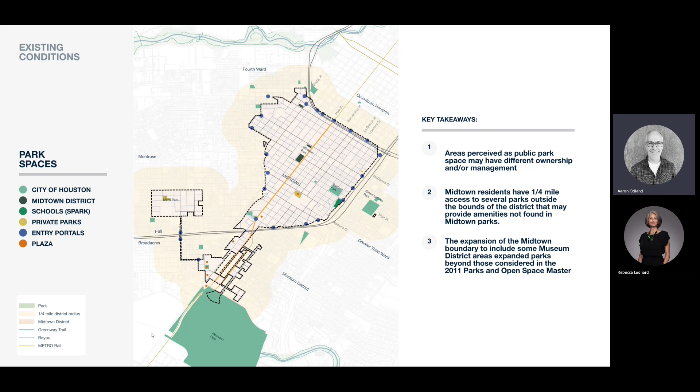This slide shows on the left a numbered key with the names of all the park spaces we saw before. The darker green ones are those that fall officially within the boundary. The lighter green ones are outside the boundary, but within that 1/4 mile offset from the district, which still makes them an easy walk in many cases for residents.

Out of the ones shown here, 11 are within Midtown, and the rest are within about that 1/4 mile walk.

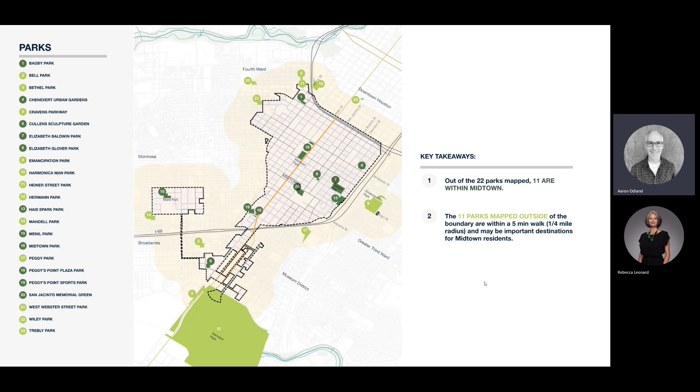Rebecca mentioned that equitable access to parks has been an important component of what we've been tracking through time, so this is the most recent example of that mapping. On the key on the left, the lighter orange colors are the 1/4 mile park buffer, meaning from a park like Midtown, you can go out a 1/4 mile radius, about a 5-minute walk. The darker orange color shows areas we're calling underserved, where you don't have access to one of those parks.

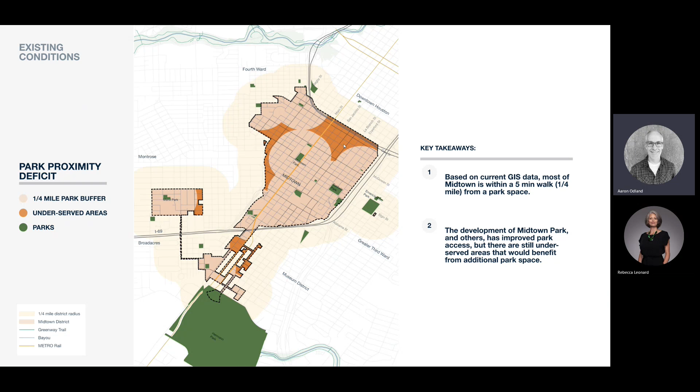While the majority of the district does fall within that access area, there are still a few areas that historically have not had it, and still don't. One of them is by Pierce Elevated in the northeast corner, one of the largest and most obvious examples. This slide shows a comparison of how those conditions have changed through time.

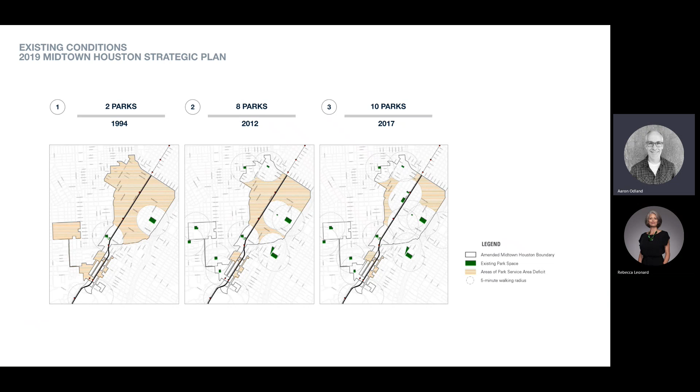You can see in the first panel, there were 2 large parks in 1994. Moving to 2012, some additional parks came online and gave more access. Then in 2017, you see Midtown Park opening in the middle, which gave a lot more close access for residents in that central area. The goal with creating this plan is to come up with recommendations on other spaces that can help fill the gaps.

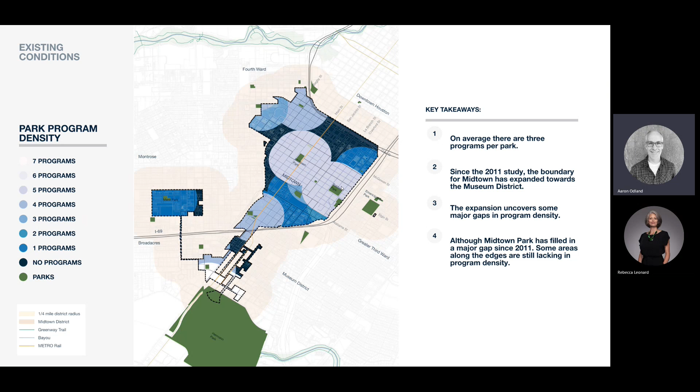Similar to the previous map showing park access, this one looks at park program density and access available. The darker blue areas in the key indicate no program, those are areas where we have no parks, so of course there's no program. But if you look at Midtown Park in the middle, the previous slide showed it had a lot of different types of program elements. That's one of the best examples of success, with people having access to a lot of different types of programs between there and Baldwin Park.

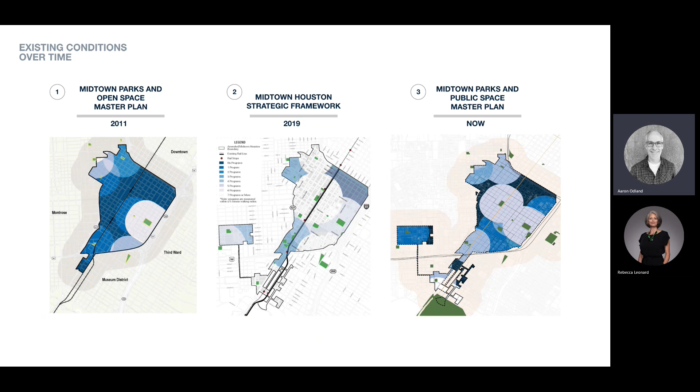Similar to that park access diagram, this is a series of maps going back through previous plans showing how this has changed through time. It's somewhat related to where new parks have occurred, but we think there are opportunities in our future create phase and recommendations to come up with strategies to offer more programs to more park spaces, to improve that equitable access.

This is a map showing the existing conditions on the roadways throughout Midtown, taken from City of Houston GIS information. It's definitely the most car-focused in what it's talking about.

On the left here, we've got the key, organized in terms of a hierarchy of how big those streets are and what volumes of traffic they're funneling through. The major thoroughfares carry the most traffic or are desired to link cars to certain areas. Major collectors come after that, then minor collectors. And then you have the freeway and expressway, which are perhaps the largest.

The local roads are the black lines here. Just wanted to note there are certain areas through Midtown, for example on the west side, where there are a lot of major collectors in couplet format—one-way streets going each way, connecting the freeway to and from downtown.

We also wanted to point out that the NHHIP plan will impact several of the freeways on the edges, including Pierce Elevated on the north side, and on the south side an area of that freeway will be sunken as well, with a potential cap and stitch condition there.

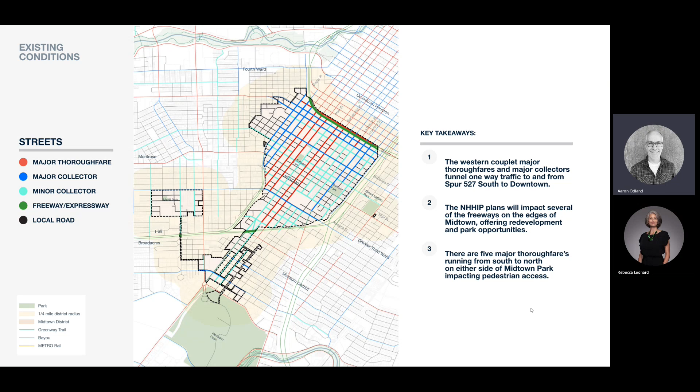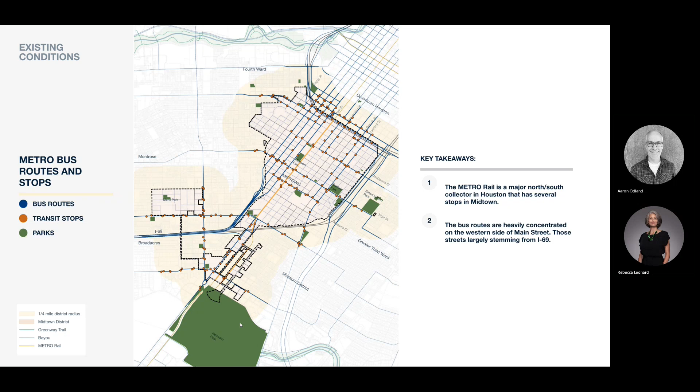One of the plans Rebecca mentioned when we were talking about the documents we were looking at was the Walkable Places Guide, and Midtown was one of the pilot areas for that. The focus was to improve the walkability and pedestrian experience of the street. Whereas the GIS information was more car-focused, this plan is more pedestrian-focused in that experience.

This will be one of those baseline conditions we dig into more as we develop recommendations on how we could think about the hierarchy of streets in Midtown in terms of them as complete streets that are built and operate for pedestrians, bikes, and vehicles.

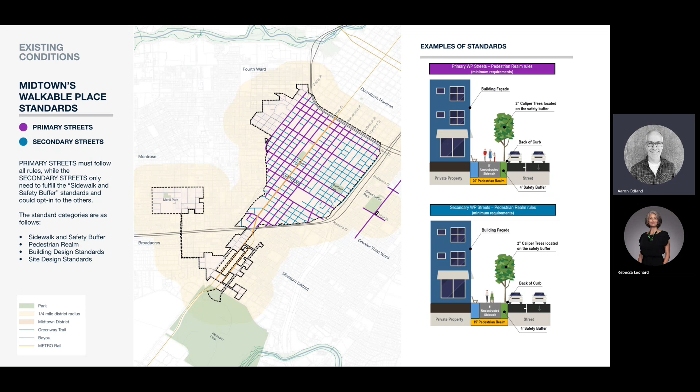Related to that, there's a website from an organization called WalkScore that analyzes walkability of areas. They look not just at human comfort from street trees and sidewalk widths, but also at the ability to access amenities.

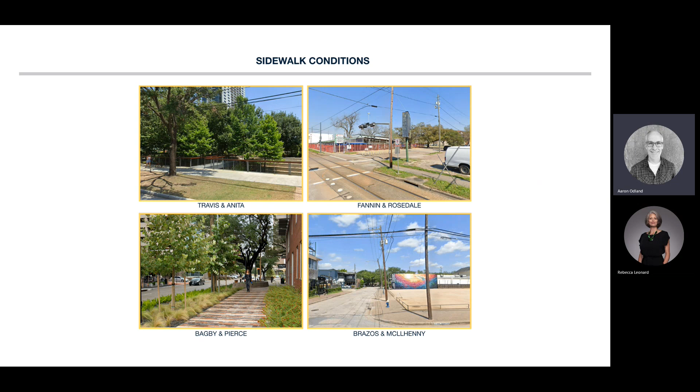As maybe the opposite end of the current spectrum, if you zoom in on the WalkScore, I found this location at Fannin and Rosedale—very narrow walks, no street trees, not quite as amenable. So when we talk about creating priorities and hierarchy and improving things, this is the range we're looking at as our baseline conditions.

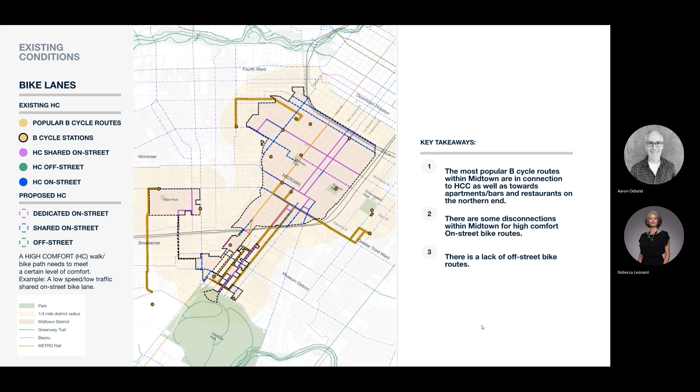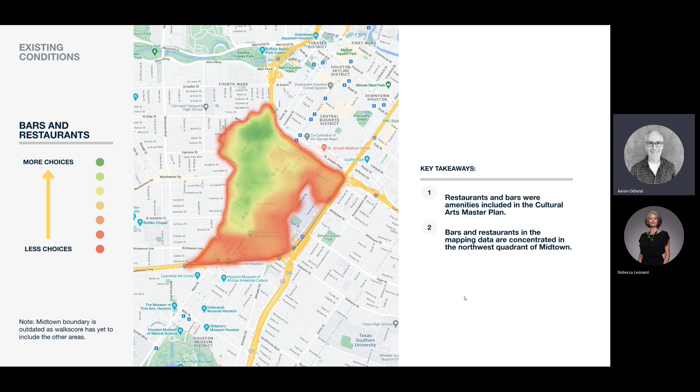Finally, we hadn't gotten to mapping the restaurants and performance venues. Those were items in the cultural arts master plan, so this was a quick take at looking at some of that. This is a map from the walk score site that shows bars and restaurants in general, which are concentrated more heavily in the western side of Midtown. So that's what we have for existing conditions now.